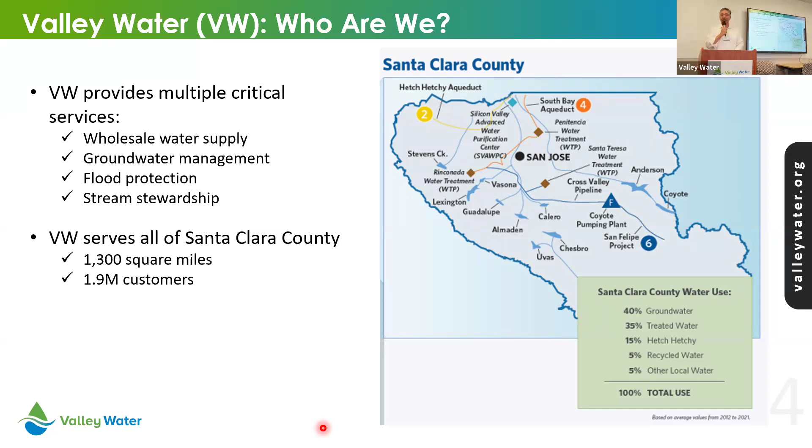A critical tool to managing all these assets in a cost-effective manner is in my next slide. So what we're looking at here is 2 scenarios: not doing master planning and doing master planning. What you can see in this slide is that master planning involves careful planning. It's holistic, systematic, and comprehensive in terms of analyzing our existing infrastructure and our future needs, ultimately creating a long-term roadmap. You hear that word a lot, a roadmap for the future. This is in order to provide safe, clean water 24/7, 365 days, and our goal is to do this for the next 30 years and beyond.

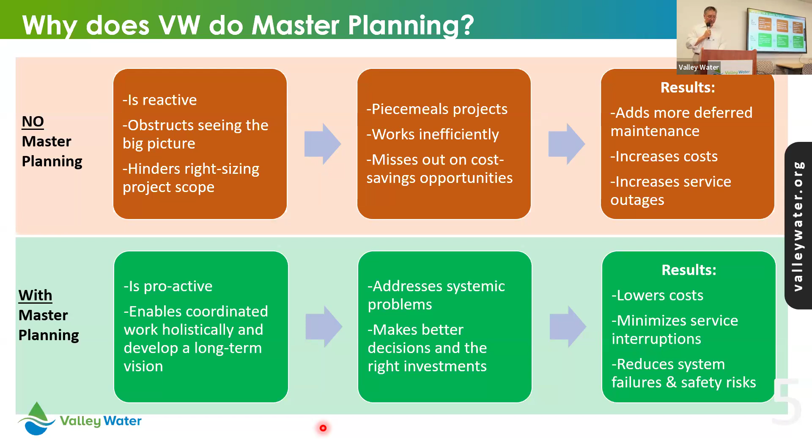This master plan is likely like, you might want to think of it as a general plan, like a city general plan, but it's entirely for water treatment plants. The master planning is ultimately used to lower costs, to contain costs. It's aimed at looking at the big picture, addressing systemic problems in our entire asset collection, reducing water interruptions, and making better sound investments. It's been almost 50 years since our last comprehensive infrastructure master plan, and that's shown in the next slide.

Many things have happened since 1975. We've had a lot of aging infrastructure. Like our director mentioned, there's a lot of new pollutants of emerging concern. There's increasing population, changes in future demand, and as the director mentioned, the climate change risks have all become more clear, with increasing challenges to our ability to provide safe, clean water.

At Valley Water, we're in it for the long run. We're making good investments, and we are planning to build infrastructure that will last. Typically, plants, whenever they approach 30 to 50 years of age, that's usually when you want to start doing comprehensive master planning. And that's shown in my next slide.

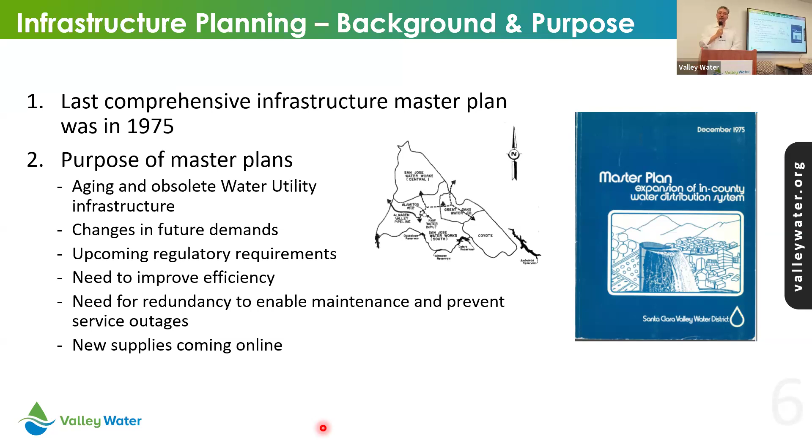What you see here in this slide is the 4 treatment plants: Rinconada, Penitencia, Santa Teresa, and the newest, Silicon Valley Advanced Water Purification Center.

Now, typically a plant's lifespan is about 35 years. Our earliest, Rinconada, oldest, was put into operation in 1967. You can see the 35-year span from 1970 all the way for the next 30 years. And you can see that after 35 years, some of them are going into their second cycle. For the next 30 years, some of them will be going into their third cycle.

This explains why you might see, for example, the Rinconada reliability, water treatment reliability improvement project - because we're doing a lot of it for stage 1 and stage 2, where we're extending the life of these plants.

Now, what this master plan does is open up a whole new era of planning beyond stage 1 and stage 2. Another similar effect you can see with the other 2 plants is that Penitencia and Santa Teresa have now gone through a significant overhaul in their system, with the addition of ozonation into their treatment system. That is part of what we have in ongoing stage 1, stage 2, and now we're looking at for the next 30 years.

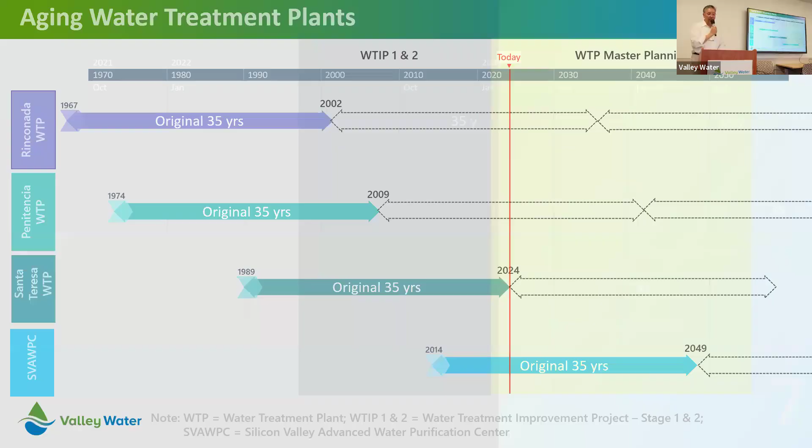You might have seen some of these concerns about aging infrastructure in our messaging, and that's in our next slide as an example. What this shows is it expresses a concern about our aging water infrastructure, the need to invest, permit, and build. I'll show you how we do this through the master planning cycle in the next slide.

A key to this slide is these 4 boxes, and the key thing is it's iterative, a cycle. The first box at the very top is we evaluate the problems - what are the problems, we define them, what are our needs, what are our gaps. The second box, we start developing solutions to these particular projects, to these problems and needs we've identified.

What are those projects? The third box down at the bottom, we coordinate and develop a 30-year program and start phasing these recommendations and projects. The fourth box, we begin implementing projects using a 10% level of design, along with the programmatic environmental impact report. Our plan is to periodically update the master plan and restart the master planning cycle.

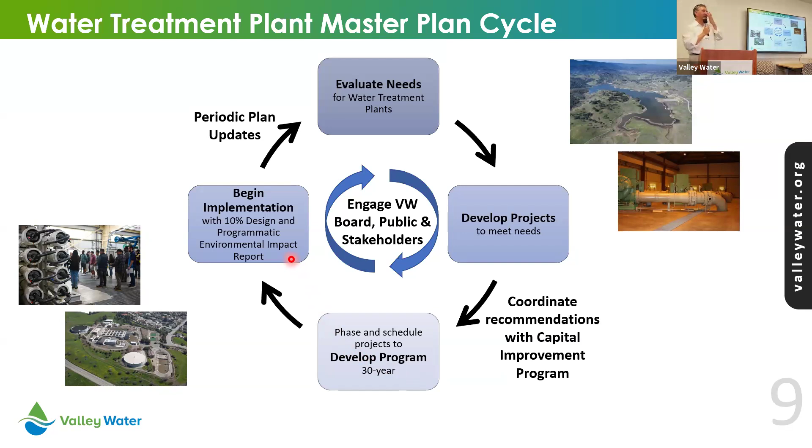Next, I'll show you a little bit more detail about this master planning development and give you some insight into the mechanics of what master planning is. So this is a very busy slide, but I'm going to go from left to right, starting from this side, and walk you through our process.

First, we start working with our planning as a basis of planning. This consists of 3 things: we define our goals and objectives for the project, we do a condition assessment, and we identify what our methodology would be. When we do condition assessment, we actually go out and inspect every single asset.

Under this scope, we have over 8,000 assets that we go through. We've collected thousands of photographs, videos, and testimonies from our subject matter experts, and we consolidate this into a condition report to get an idea of what our infrastructure is, what level of reliability, and how much life is left in our assets.

Next, we start looking at and putting all this together - all these conditions - and developing what our needs are. We've created a whole list of needs, and we work with our engineers and professionals to classify them into 3 categories: high priority, low priority, and medium priority in the middle. We group them so we can prioritize and work on the next cycle, bundling them into projects for the next 10 years, and then 10 years afterwards, and so forth.

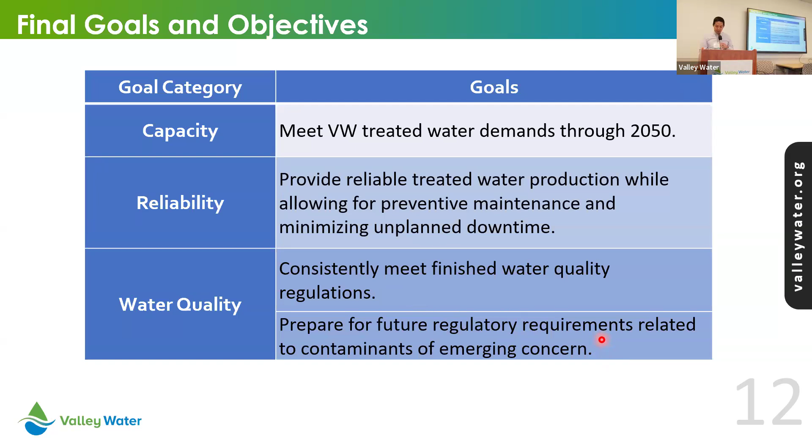Last 2 goal categories that we had are climate mitigation and equity. Under climate mitigation, we have really two prongs: adaptation and mitigation. Under mitigation, we want to reduce our greenhouse gas emissions at the treatment plants, maybe thinking like electric vehicles or more efficient generators for backup, things like that.

Under adaptation, climate change is warming the climate, so we want to make sure our electrical rooms and mechanical equipment can operate under higher temperatures. We want to make sure we have enough air conditioning and HVAC equipment to sustain operations.

Our equity goal also has a 2-pronged approach. We want to incorporate equity into our process and our outcomes. Under outcomes, we want to make sure whatever projects we produce are equitable to our community, and also be aware of the impacts to rates and the costs of the projects, as Miguel's mentioned many times. On the process side, we want to involve the community, stakeholders, and our retailers in the development of this master plan, and part of that is why we're here today.

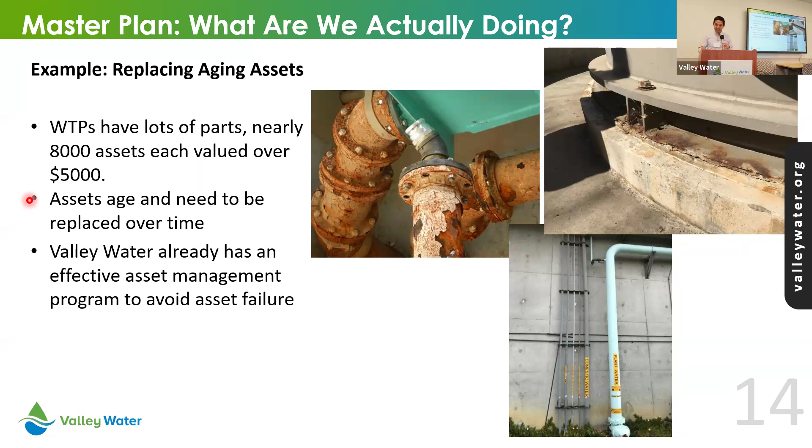On the next slide, I'll cover some improvement projects. This is an example of a reliability type project. For reliability, if there's a critical chemical, we want to make sure we have at least a backup tank of that chemical ready to go in case there's a leak on the tank, for example. So we've identified areas where we could improve and add more storage, across all three plants. This helps us make sure we have sufficient chemical storage when demands go up in high flow season.

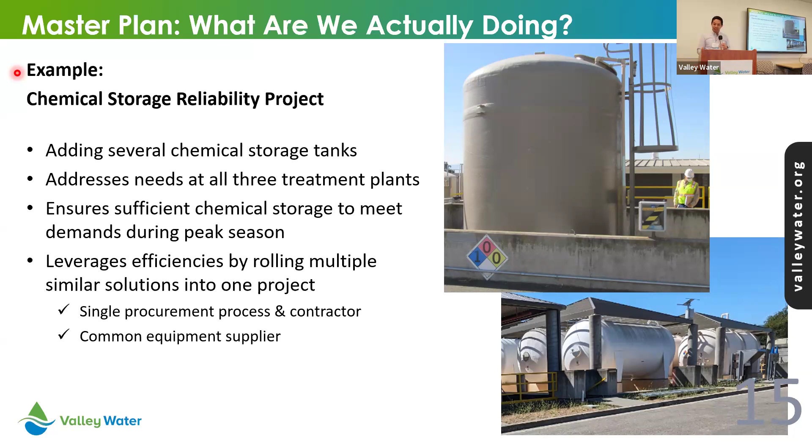So this is an example of a process improvement. On the next slide, I talk about how these kinds of improvements get pulled together. I mentioned before, we've got aging equipment, equipment that's going to be corroding and getting into a condition that needs attention, and those are out in this pool.

This conceptual slide shows, over a 10-year period, how we looked at all of these needs, which might have individual needs for replacement in different years within this 10-year window. The way we're grouping them is conceptual project A and conceptual project B. If the needs fall within the first 5 years, it makes sense to bring them together. Sometimes it's age-based, sometimes it's based on the year, sometimes it's based on where that need is at the treatment plant, making sure we can be efficient about taking part of the treatment plant down and doing the work in that area at one time.

In project A, we're grouping the needs, and in project B, we're grouping the needs, and then we'll implement them in two steps, two phases. In project A at a treatment plant, we'll design and construct it. Then while that project is in construction, we'll start the design for project B, and do construction for that in the second half of the 10-year period.

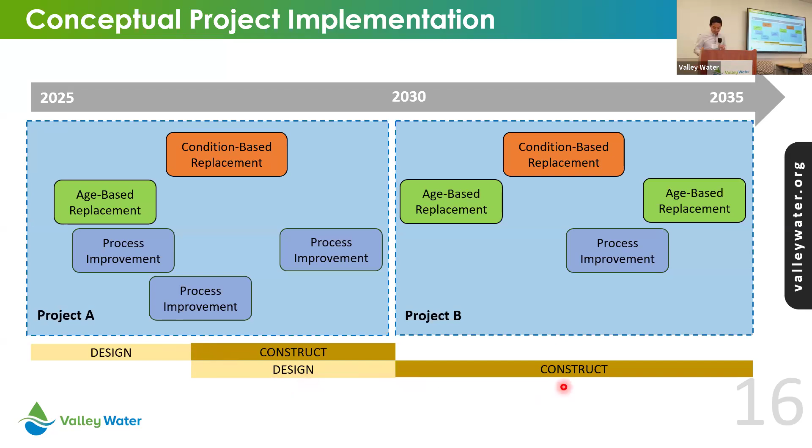Having done all of that, at a preliminary level, like Miguel mentioned, we still have a lot of refinement to do, but we want to present, at a high level, at Santa Teresa, we're looking at proposing 2 capital projects over the first 10-year period, the high priority period: capital project A valued at 21 million, and capital project B at a cost of 49 million. At Penitencia, we have 1 capital project, project A, at 66 million. And at Rinconada, capital project A with a cost of 41 million, and a second project cost of 19 million.

Before we go to the next slide, I just wanted to quickly say, why is there one project at Penitencia?

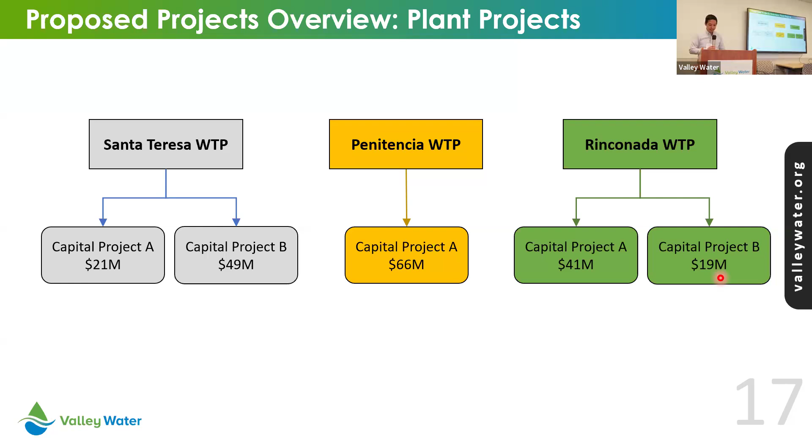As Director Shoya mentioned before, on this side of the county, Santa Teresa and Penitencia feed the distribution system to treated water retailers on the east side. Santa Teresa's capacity happens to be 100 million gallons per day, and at Penitencia the capacity is 40 million gallons per day. So we're thinking if we're going to be taking parts of the treatment plant down to do work, maybe we could do one longer shutdown at Penitencia during the winter and allow Santa Teresa to cover the demands on the east side, and not have to come back and do multiple projects at Penitencia. So that's one of the efficiency thinking there. We'll go to the next slide, please.

I mentioned before the chemical storage tanks as a project that needs to be addressed at all the plants. This is another idea for finding efficiencies in the project: if we have needs that are at multiple plants, we can group those into one project and have one contractor bring the same type of equipment to all three treatment plants, with the same spare parts and the same maintenance requirements. Under a chemical storage or reliability improvement project, that one was proposed at $40 million.

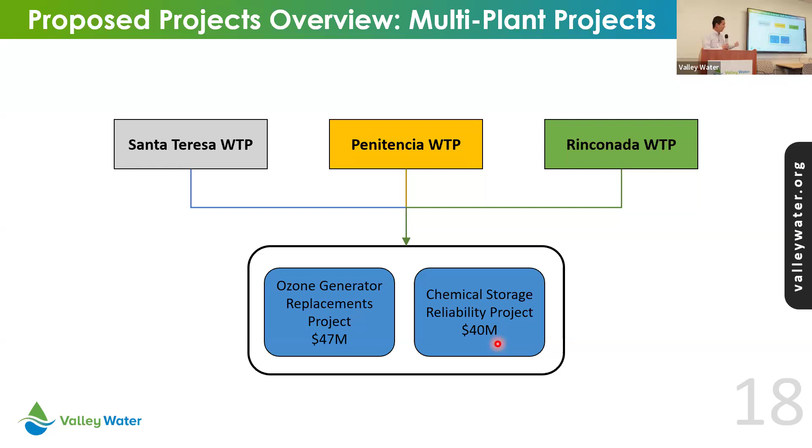We also have another multi-plant project in the same kind of thinking. That one's an ozone generator replacement project, which would be just at Santa Teresa and Penitencia, at $47 million. For folks, ozone is the primary disinfection equipment.

This slide shows at a summary level the costs of all the projects on one page. I did want to note that the total sum of all of these is we plan to spend $283 million on all the water treatment plants over the next 10 years. And that's the way that we're bringing good value, considering the overall value of Valley Water's infrastructure over the next decade.

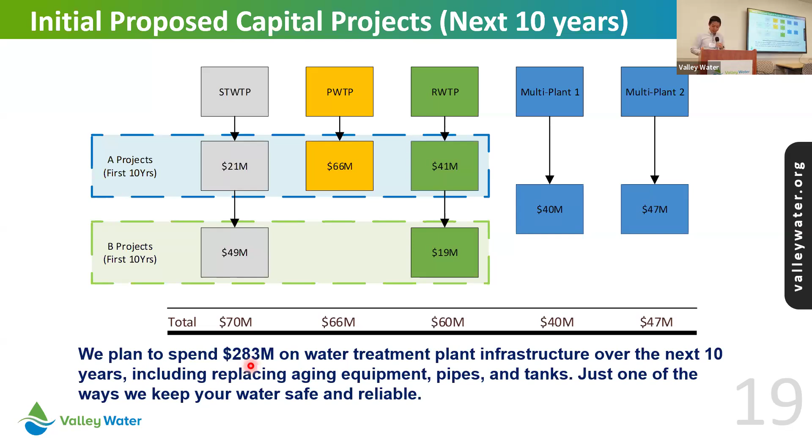In my final slide, I'm going to give an overview of Valley Water's infrastructure value. There are two pie charts here. This first pie chart shows the total infrastructure replacement value, what it would cost us to replace our assets in 2020 dollars, pre-inflation. So we have the dams, the pipelines, our ponds, recharge ponds, our raw water pump stations. All of those combined is about $5.2 billion. Then in the blue piece of this pie, the treatment plants were valued in 2020 at $1.7 billion.

If we zoom in on that blue circle on the right, you see Rinconada's replacement value is $750 million, the Advanced Purification Center is $64 million, Penitencia is $354 million, and Santa Teresa Water Treatment Plant is $650 million. So we think that doing some overall comprehensive planning, that $283 million is actually pretty good value for the value of the assets that we're maintaining.